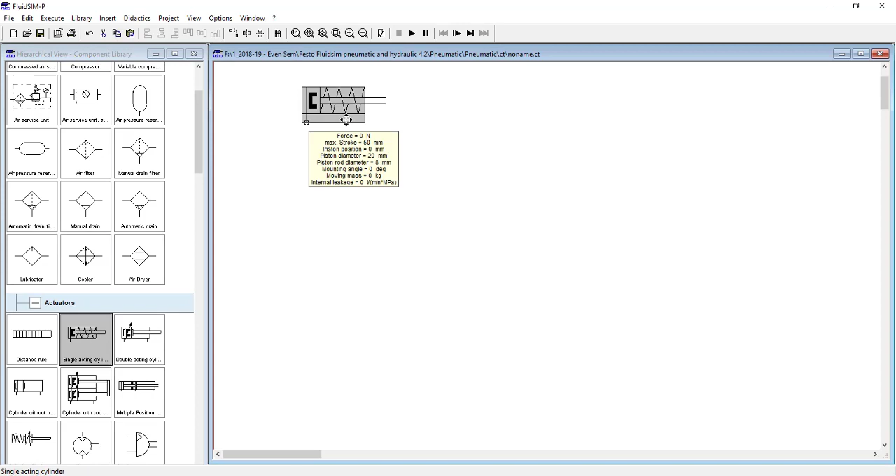Whenever we are doing any kind of pneumatic circuit, in our syllabus there are two main actuators: a single acting cylinder and a double acting cylinder. A single acting cylinder has only one connection while a double acting cylinder has two connections. Whenever you want to push the single acting cylinder forward, you give compressed air to this point.

As soon as there is compressed air at this point, the spring gets compressed because of the force of the compressed air, and the piston moves forward. When the compressed air is removed, the spring forces the piston back and it moves backward. So in this way, you have the forward and backward motion of the piston.

In case of a double acting cylinder, if you put compressed air into the left side and take air out from the right side, then the piston will move forward. Similarly, when you want the piston to move backward, put compressed air into the right side and take the air out from the left side. Then the piston will move backward.

To operate a single acting cylinder, you have to control only one port. To operate a double acting cylinder, you have to control two ports. In a single acting cylinder, there is only one port that must be controlled, hence we need a valve which has only one output port.

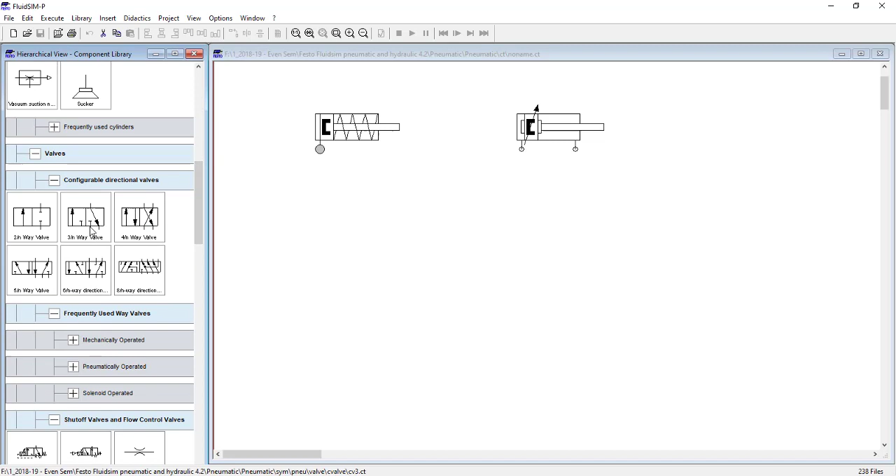For this, we use a 3x2 direction control valve. A 3x2 direction control valve has only one output port. There are two source ports: one is connected to the compressor and three is connected to exhaust. So we will attach this over here, with one always connected to the compressor and three to exhaust.

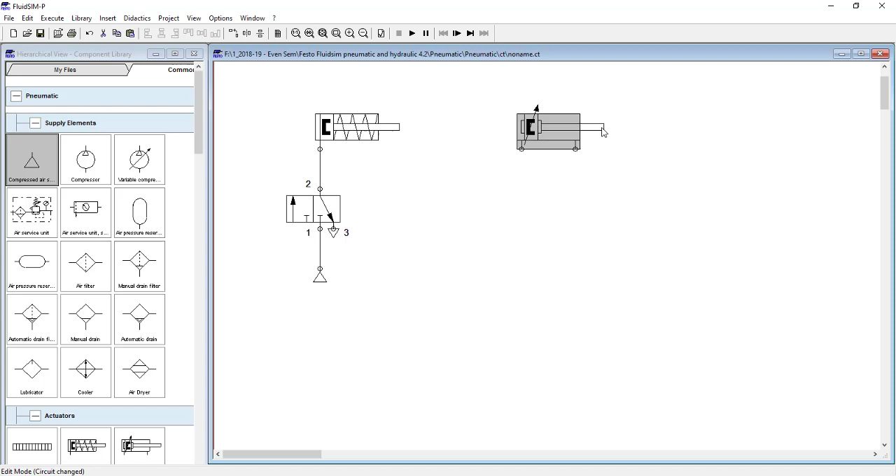For now, I will remove this double acting cylinder. So this is the basic control diagram for a single acting cylinder.

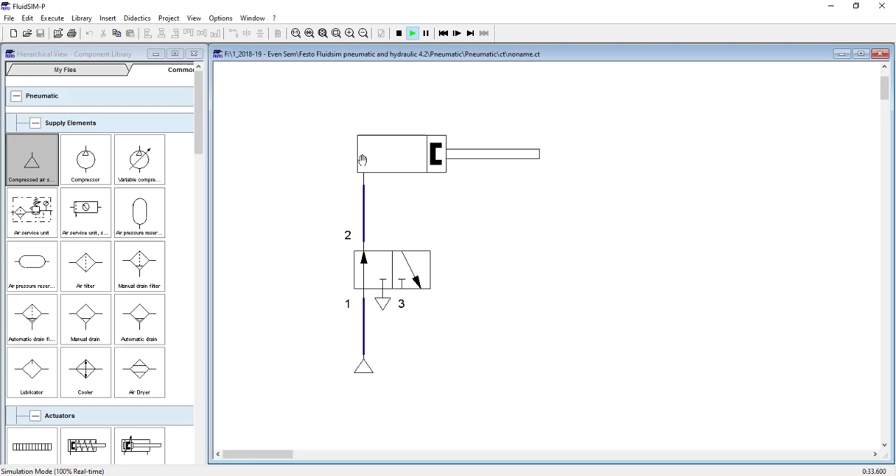Now, if we start the simulation and actuate this, the position of the valve changes. As soon as the position of the valve changes, compressed air goes up, and because of that, the piston moves forward. I'll make it a bit slow to show this. Again, when I deactuate the valve, the spring forces the compressed air out through the exhaust and the piston moves backward.

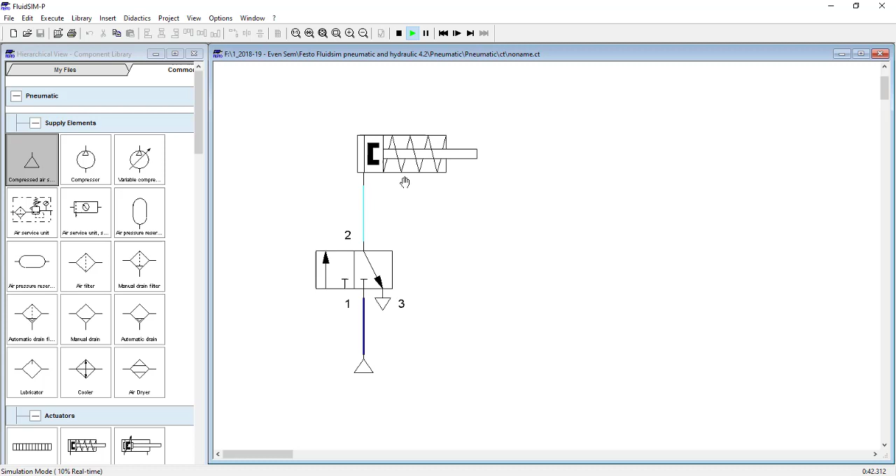So this is how a single acting cylinder is controlled.

Now, as we discussed in the previous lecture, there are several different methods of actuating this valve. There are some manual methods. This is the symbol for a push button. Whenever you have a push button on one side, you will need a spring on the other side. So this is the symbol for a push button operated 3x2 direction control valve.

Instead of a push button, it is possible that you may have a switch. So for a switch, this will be the symbol, with a switch on either side.

Then instead of a switch, you can have something known as a limit switch. A limit switch is similar to a push button; the only difference is that in a push button, humans have to push it, but in case of limit switches, it is the piston motion. A piston comes and hits a certain part, and because of that, the limit switch is activated. Limit switches are used to know the position of the piston.

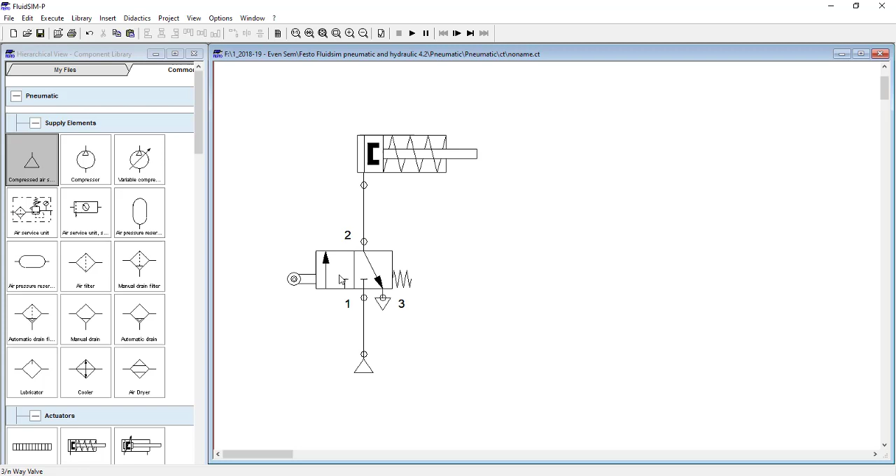All this was covered in the last lecture. Then another method of actuation can be pilot operated. When I say pilot operated, it means that compressed air will be used to change the position of the valve.

If compressed air comes from the left side, the left position will be activated. If compressed air comes from the right side, the right position will be activated. So this is how the different methods of actuation work in case of a pure pneumatic circuit system. In our case, we will be using pilot actuation for pure pneumatic circuits.

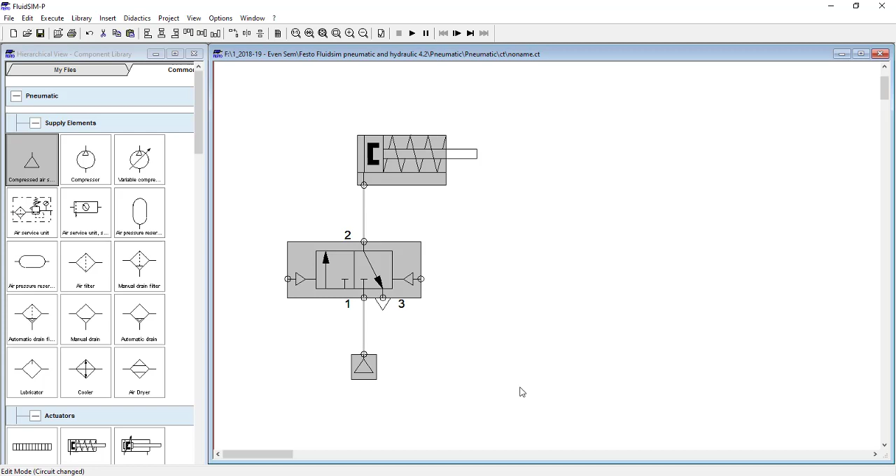In your syllabus, you do not have the pilot actuation of a single acting cylinder. So first we will see how to make the circuit for one double acting cylinder. After we complete that, we'll make circuits for two double acting cylinders.

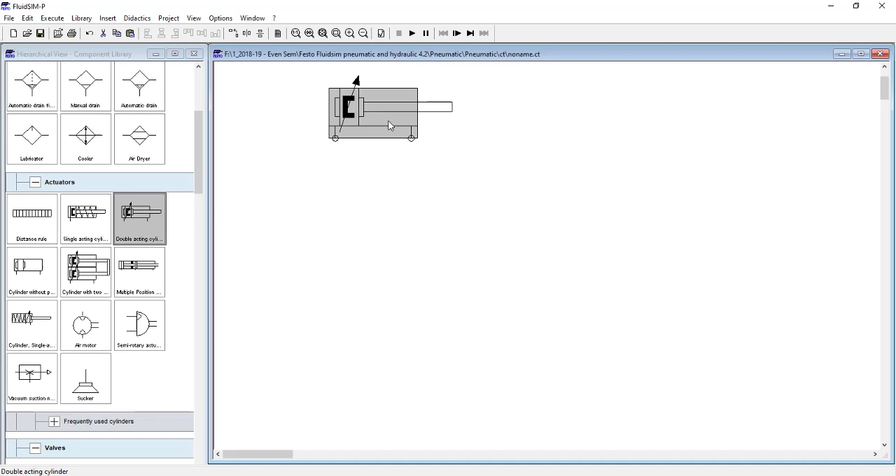Now we will learn how to make a complete pure pneumatic circuit for a double acting cylinder. First, if we want to make a circuit for a double acting cylinder, we will require a double acting cylinder.

Remember, when you are drawing in exam, this should be the diagram for a double acting cylinder, right? No C over here, no arrow over here. This should be the diagram for a double acting cylinder. But right now, because of the requirements of this software, I have to draw this C over here. I will explain this C to you afterwards, but remember that this is just a diagram requirement for this software.

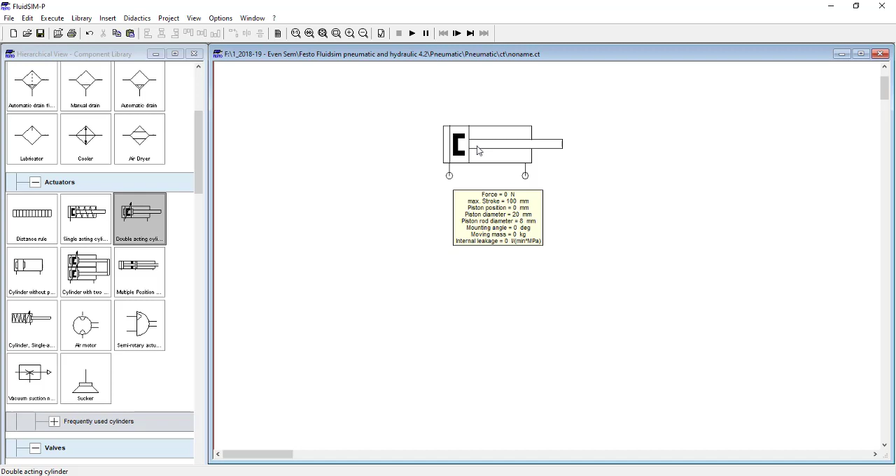Now I have to operate this double acting cylinder. A double acting cylinder has two ports, so to operate this cylinder, I need a valve which has two output ports. So what is the best example?

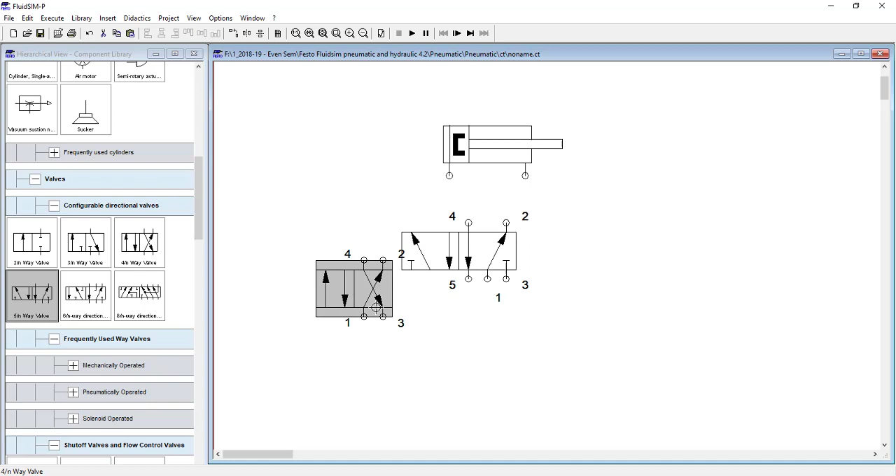I can use either a 4 by 2 valve or a 5 by 2 valve. A 4 by 2 valve also has two output ports, 2 and 4. Similarly, a 5 by 2 valve also has two output ports, 2 and 4. But in case of pneumatics, we use a 5 by 2 valve, and in case of hydraulics, we use a 4 by 2 valve. So as we are doing a pneumatic circuit, we will delete this 4 by 2 valve and use the 5 by 2 direction control valve.

So remember, whenever you draw a double acting cylinder, to control the pneumatic double acting cylinder, we will require a 5 by 2 direction control valve. Now with this, we will make the connections. We will connect the left port of the 5 by 2 valve to the left port of the cylinder, and the right port of the 5 by 2 valve to the right port of the cylinder. So these connections are done.

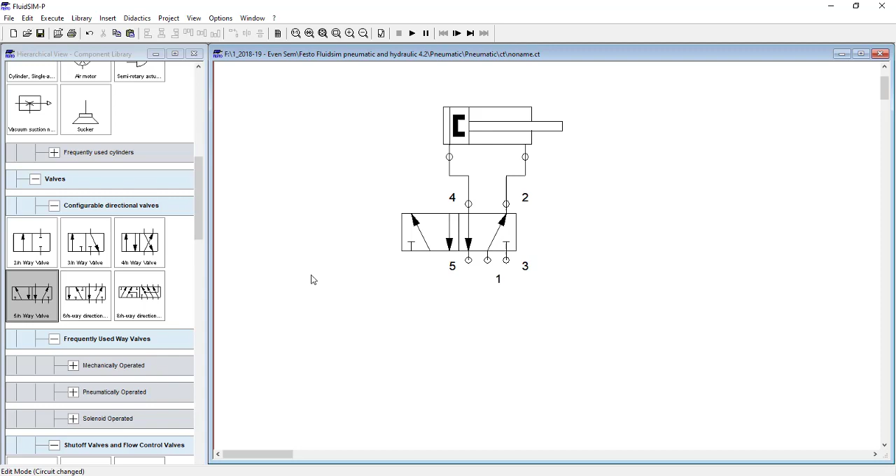As I always say, port number 1 should be connected to your compressor. Over here, port number 5 should be connected to exhaust and port number 3 should also be connected to exhaust. Always remember, number 1 is connected to compressor and the other ports on the source side are connected to exhaust. Now, how should the position be set?

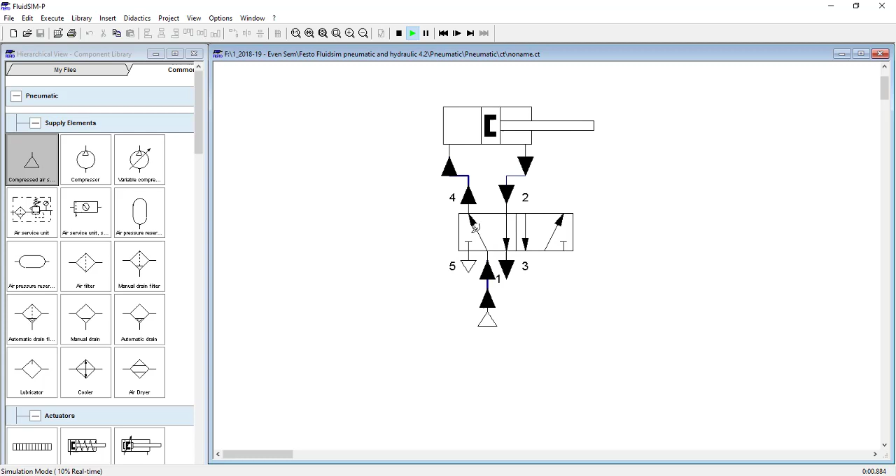First, we will just see the simulation of this. Initially compressed air is going to the right side, so the piston is in retracted position. As soon as I do this, compressed air goes to the left side and the piston moves forward. As soon as I do this again, compressed air goes to the right side, air comes out from the left side, and the piston moves backwards. So this is happening right now.

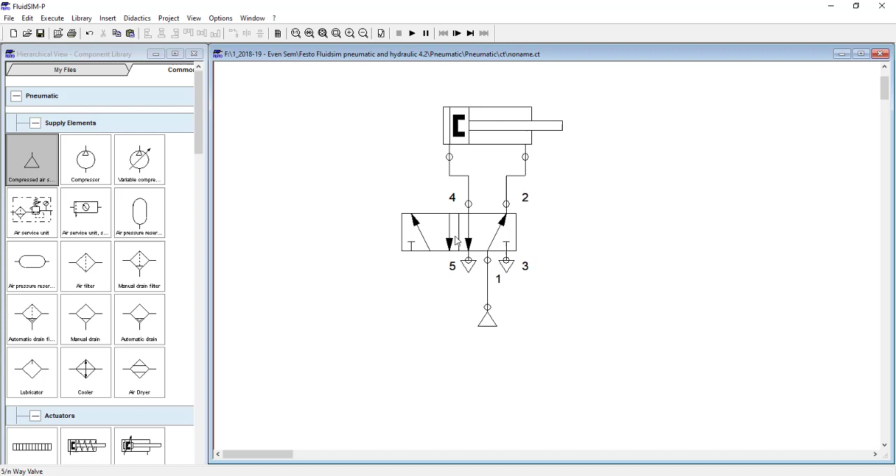Now what is the problem? The problem is how to actuate these valves. Right now there is no method of actuation. We are doing it with the mouse, but physically, if we make this circuit in real life, how are we going to change the positions of the valves? So we need some method.

That method can be either a push button. I am just putting a push button over here. As long as I keep this push button pressed, my mouse is currently pressed, the piston is forward. As soon as I leave my mouse, the piston comes backwards. So I press it, it remains forward. I leave it, the piston comes backward.

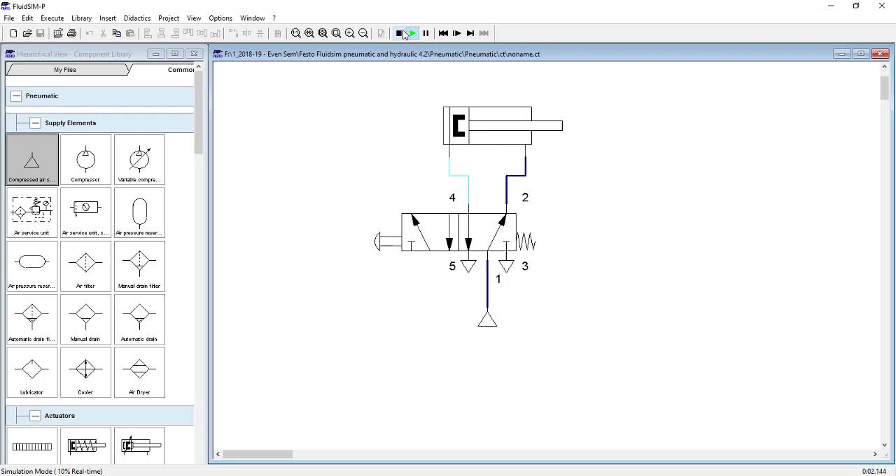Instead of this, I can use a switch. Instead of a push button, I can use switches. Now if I turn it on, I just have to click it and leave it. Even if I leave it, the piston remains forward. If I want to bring it back, I have to click the switch again and the piston will come back. So this is how I can control the double acting cylinder manually.

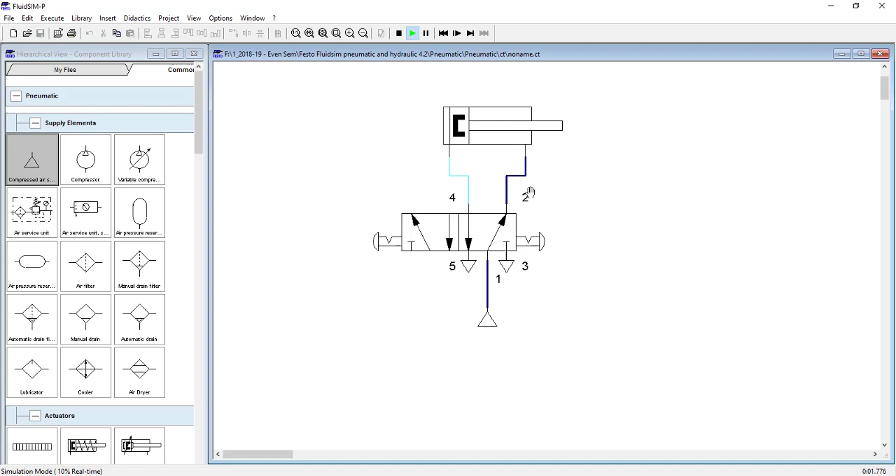But in industry, we do not want complete manual control. We want some degree of automation. For example, let us say we are making some kind of a pounding device. So what is this piston doing? Once we turn on the system, the piston should move forward, pound whatever is to be pounded, and then move backward. A good example of this kind of machine can be your stamping machine.

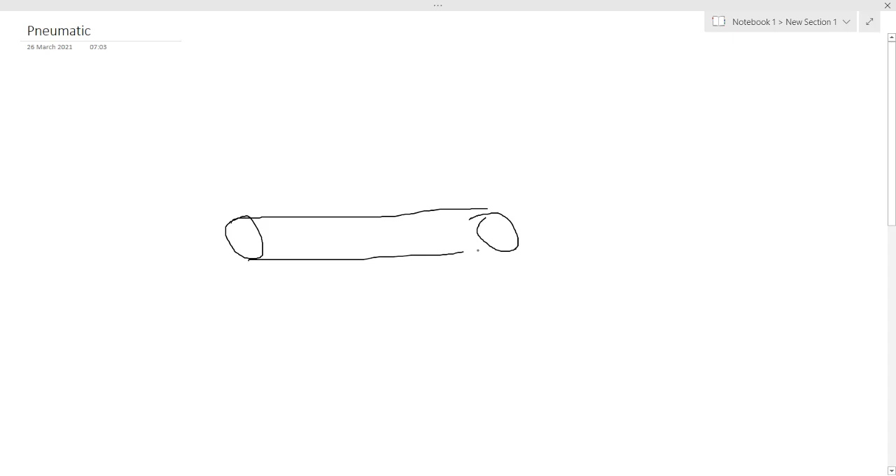For you to visualize, let us see this: there is a conveyor belt, and on this conveyor belt there are some kinds of things which are moving forward.

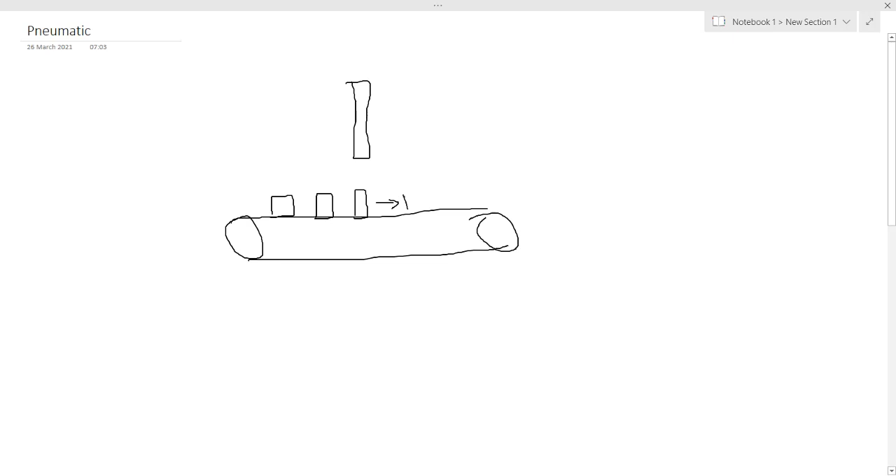Okay, so these objects are moving forward on a conveyor. It is necessary that these things have to be compressed, or something has to be done to them. Their shape has to be changed, or some kind of design or label has to be put on them. So to do that, what is required? There is this piston cylinder arrangement. Whenever this object comes forward, this piston should move down, stamp this thing, whatever has to be done is done, and then the piston moves upward. Next object comes, again piston moves down and up. Again next object comes, piston moves down and up. Now the speed of the conveyor belt is fixed, so the objects come at a fixed speed.

So if we can control the timing of this piston, we can control the stamping of these objects. This is exactly what we want our piston to do: come forward once, then go back, then again come forward, then go back, and this process should continue infinitely. Once the system is started, this should continue infinitely. So we have to make a circuit that once I turn it on, it will keep on stamping till the end. This type of circuit is known as an A plus A minus circuit.

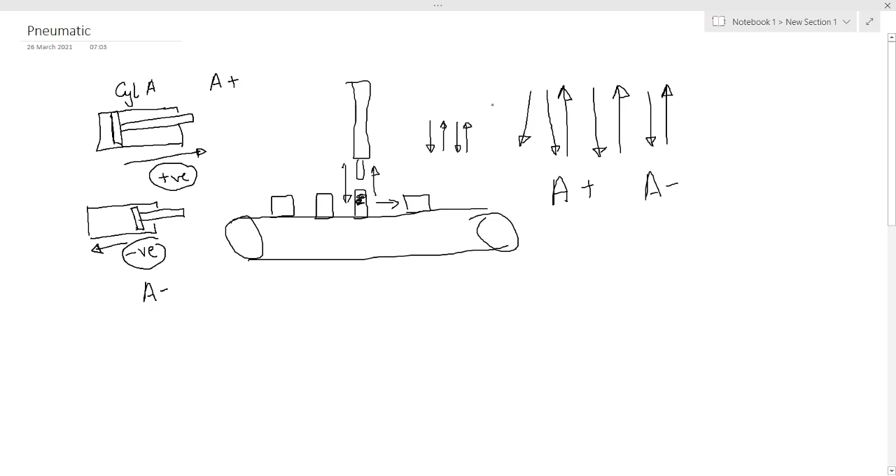Now if I name my piston cylinder arrangement as cylinder A, the forward motion will be termed A plus and the backward motion will be termed A minus. So in my circuit, what is happening? First there is forward motion, outward motion, then reverse motion, inward, outward, inward. So outward motion is symbolized by A plus, and inward motion is symbolized by A minus. My system is continuously doing A plus, A minus motion.

So I have to make a circuit in which as soon as I press the start button, the piston should move forward. After the piston has reached its ultimate point, the maximum point possible, the piston should move backward. Again, when the piston has reached its ultimate reverse point, it should again move forward, then backward, then forward, then backward. This should continue.

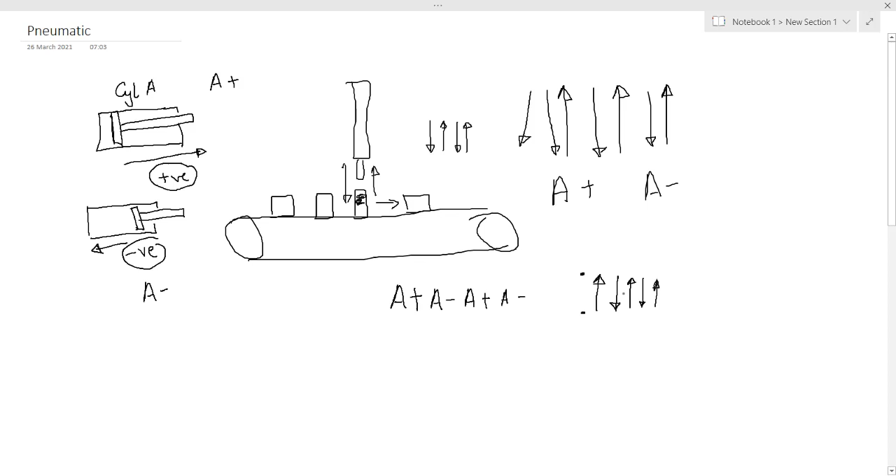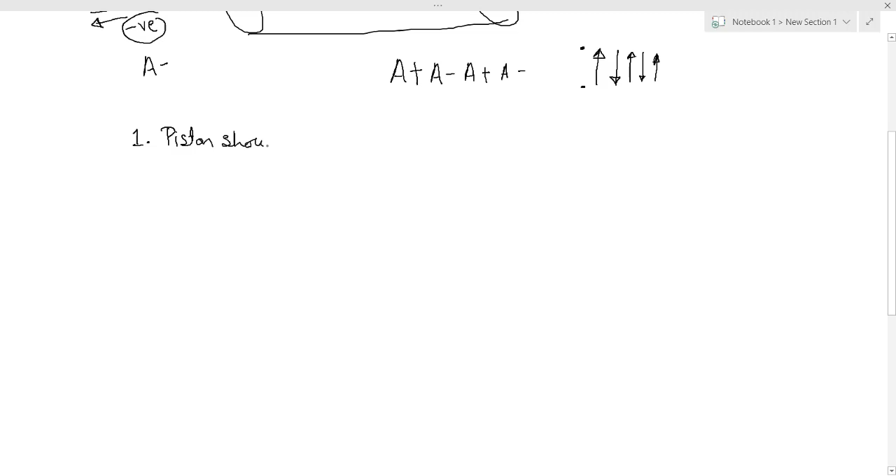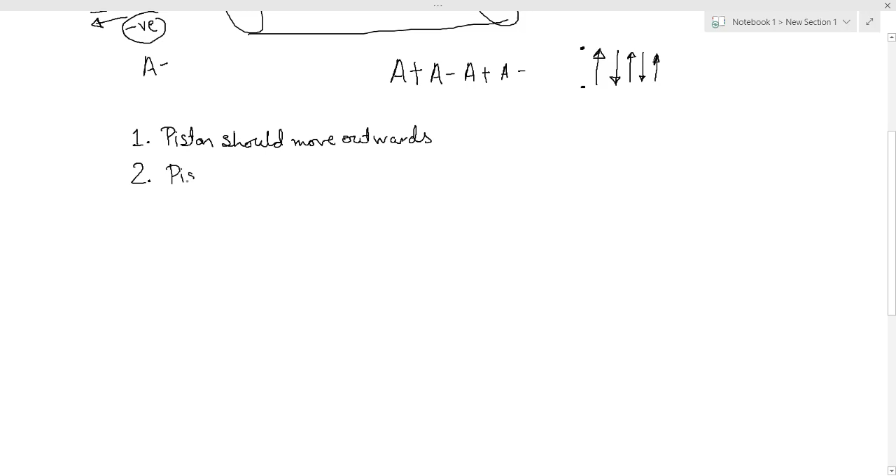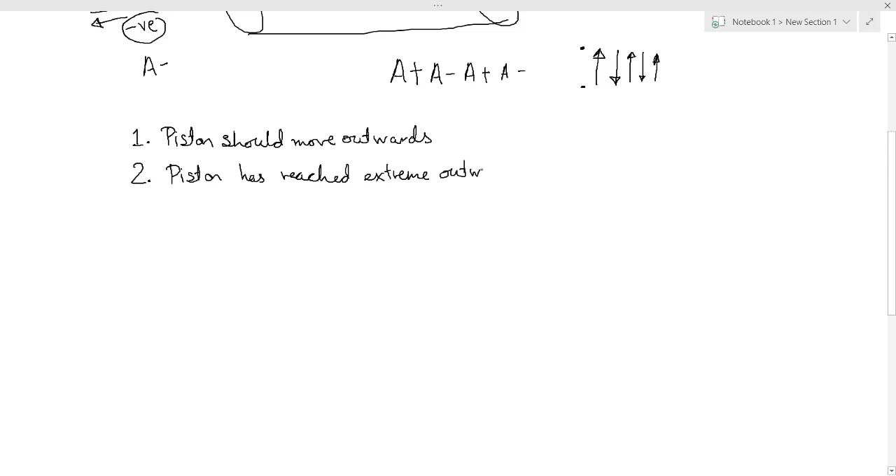So first, before making the circuit, we will write these steps in English. Step 1: piston should move outwards. Then, once the piston reaches its most outward position, that is, the piston has reached its extreme outward position. Once that happens, the piston should start moving backwards.

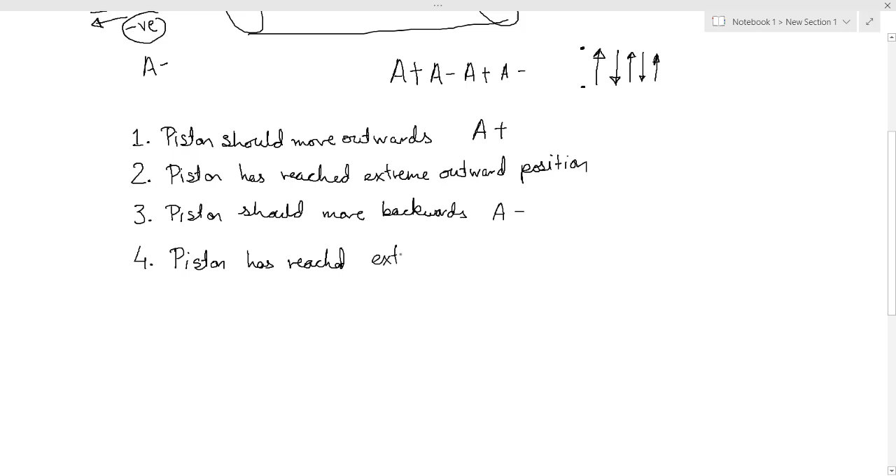Piston moving forward is A plus, and piston moving backward is A minus. Now the piston has started moving backwards. It should move backwards as long as it does not reach its most inward position. As soon as it reaches its inward position, the piston has reached its extreme inward position, meaning it has retracted back completely. After that, again the piston should move outwards. This step should take place again. So this is how the system should continuously operate.

So what do we require? We require some way of knowing that the piston has reached its extreme outward position and that the piston has reached its extreme inward position. So we need some kind of sensor which will tell us that the piston has reached its outward position.

Now it is time to change the direction of the valve so that the piston starts moving inwards. Again, we need some kind of sensor which will sense that it has reached its extreme inward position. So now again the valve's position must be changed so that the piston starts moving forward. We need two sensor kind of things, but we will not be using any kind of proximity sensor, because this is a pure pneumatic circuit. We cannot use sensors in this case.

So in pure pneumatic circuits, rather than using sensors, we use limit switches. What does a limit switch do? A limit switch uses the position of the piston to turn on and turn off the valve, and this valve can control the flow of air. I have explained limit switch in detail in the last lecture. So this limit switch can be used to change the position of the valve and thus change the position of the piston. Now where should these limit switches be put?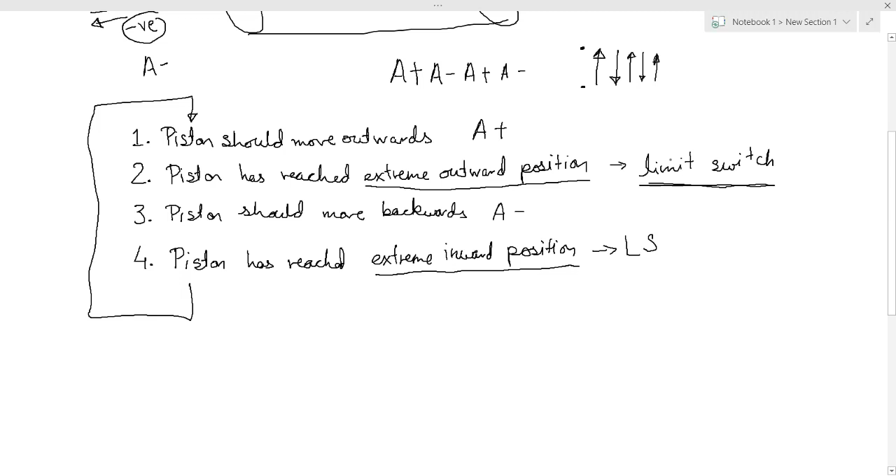See, this is my system. Let me draw it over here again. This is my cylinder, and inside my cylinder, this is my piston. Let us say that this is the complete retracted position of the piston, and when the piston comes completely forward, this is the complete forward position of the piston. So I need to put a sensor over here so that whenever the piston is completely inside, this will be active, and whenever the piston is completely outside, this will be active.

So in pneumatics, the complete inward position of the piston is denoted by A1, and the complete outward position of the piston is denoted by A2. So we need two limit switches, A1 and A2, which will be used to change the position of the valve and thus allow for the motion of the piston.

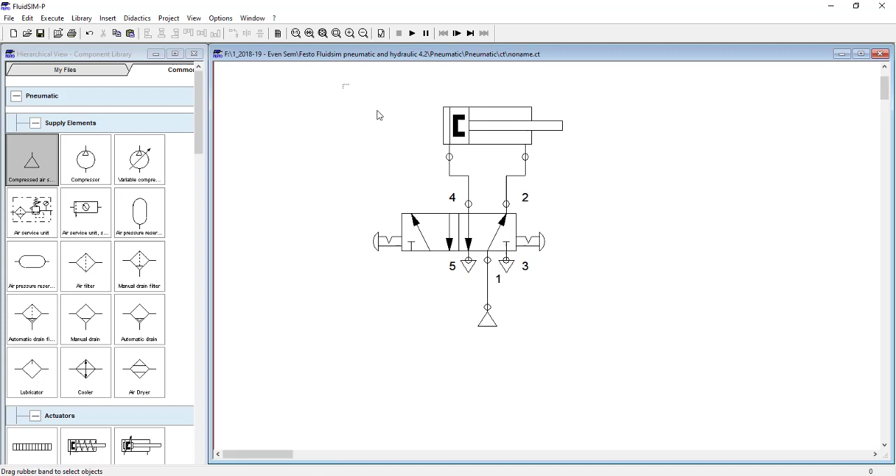Okay, so this circuit we will now be drawing in our software. So this is our initial circuit. In this initial circuit, what we were doing, we were using limit switches. But now what we have to do, we have to make this automatic. So first of all, we need two limit switches, because this is a double acting cylinder.

So A1 limit switch is telling you what? A1 limit switch is telling you that the piston is completely retracted, completely inside. A2 is telling us that the piston is completely outwards, completely outside. So now we have to draw these limit switches also.

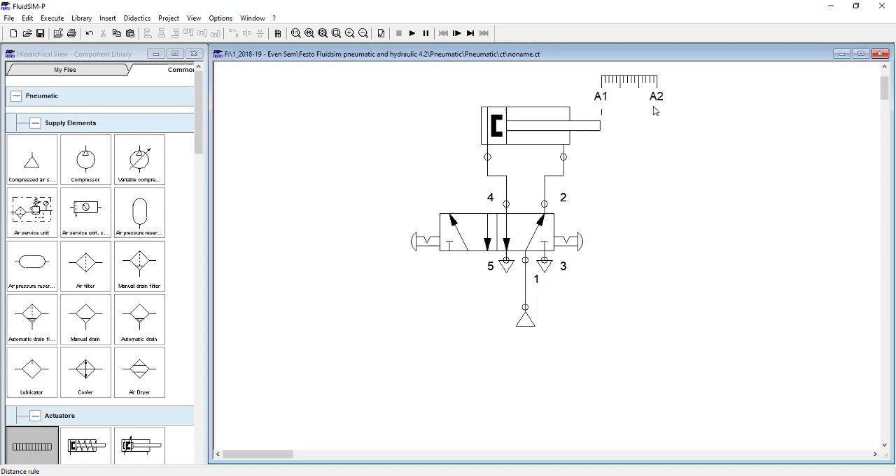Here we have just marked the limit switch position. That limit switch will be at this point and limit switch will be at this point. What are limit switches? As I have told you again and again, limit switches are nothing but 3x2 direction control valves. The only difference is the actuation is with a limit switch. So this is my limit switch, 3x2 direction control valve.

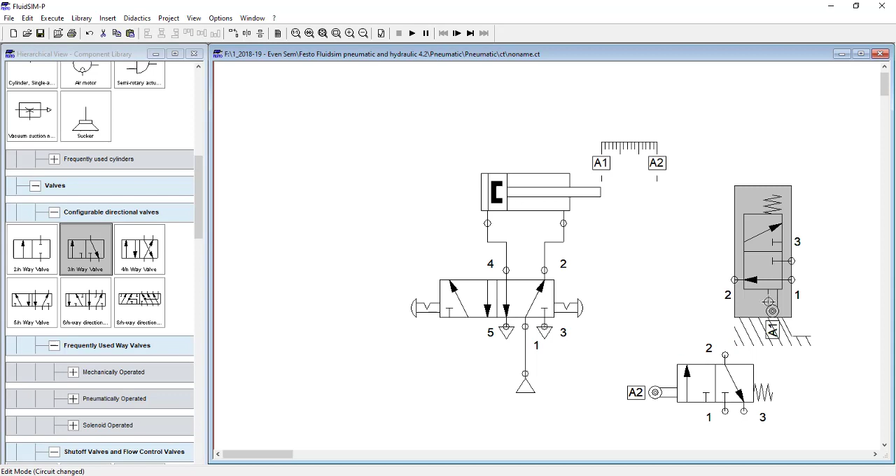We need how many limit switches? We need 2 limit switches, A1 and A2. So let this be A1 and let this be A2. In real life, rather than doing like this, we are going to rotate it by 90 degrees. A1 will be kept over here.

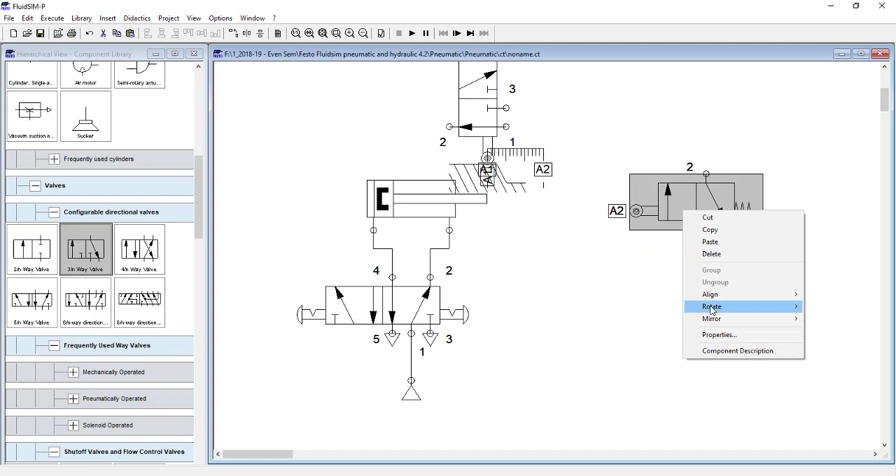Just give me a minute. This is my A1. So A1 will be kept over here — this will be my A1 limit switch. Similarly, A2 limit switch will be kept over here. Let us rotate it further by 180 degrees. I can put A2 limit switch over here.

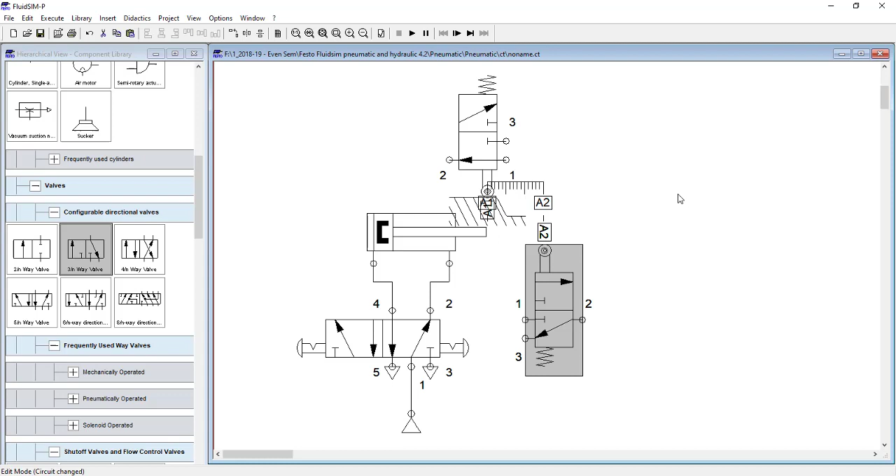So whenever the piston moves forward, it will operate. Whenever the piston is inwards, completely in, A1 limit switch will be pushed, and when the piston comes completely out, A2 limit switch will be pushed. But drawing these limit switches like this makes the diagram very cumbersome — we cannot easily read it. So to make this diagram more readable, we just mark the position of the limit switches A1 and A2, and we draw the limit switches below only. Okay, so this is how the system works. Now see what should happen.

This is my A1 and this is my A2. Whenever A1 is sensed, first the piston should move outwards. For the piston to move outwards, the left position of the valve should be active. Whenever the left position of the valve is active, the piston will move forward. As soon as it reaches A2, it has reached the maximum possible distance, so now it should start moving backward.

To move backward, the right position of the valve should be active. To move forward, left position of the valve should be active. To move backward, right position of the valve should be active. So whenever we want to move the piston forward, we should activate the left position.

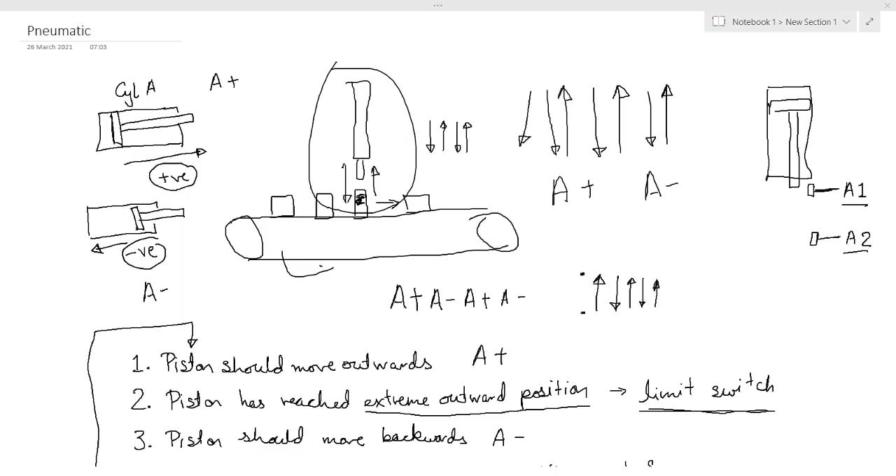Now, when should the piston move forward? The piston should move forward when the A1 position sensor is sensed. When is A1 position sensor sensed? When the piston is completely inside. The piston should move outwards, and it will keep moving outwards till it reaches its extreme outward position, which is A2.

As soon as it reaches A2, it should start moving backwards. It will continue to move backwards till it reaches its extreme inward position, which is A1. As soon as A1 sensor is sensed, the piston should start moving outwards. So when should the piston start moving outwards? When A1 sensor is sensed. And when should the piston start moving inwards? When A2 sensor is sensed.

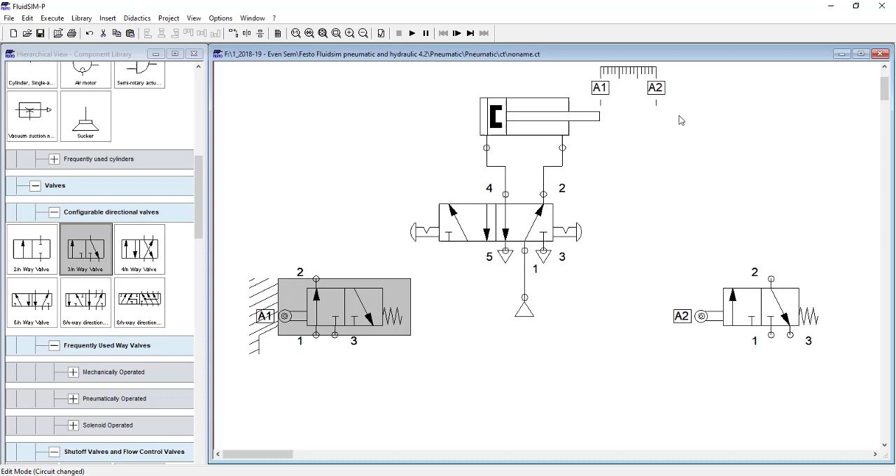When A1 sensor is sensed, the piston should start moving outwards. It will continue moving outwards till A2 sensor is sensed. As soon as A2 sensor is sensed, the piston should start moving backwards. So this is the circuit that we are going to make. Whenever A1 sensor is sensed, the piston should start moving forwards. A1 is inside, so piston should start moving forward.

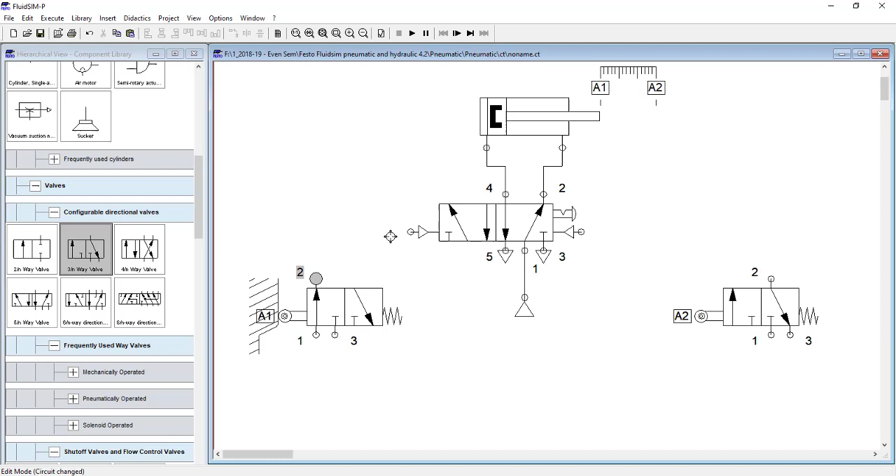For this, for pure pneumatic circuits, we are going to use pilot operated valves. So whenever A1 is sensed, this left position should become active. We will put a limit switch connection like this. Whenever A1 is active, currently it is completely inside. Compressed air is going from this compressor and it will push this one active, making this position of the valve active, and the piston will move outwards.

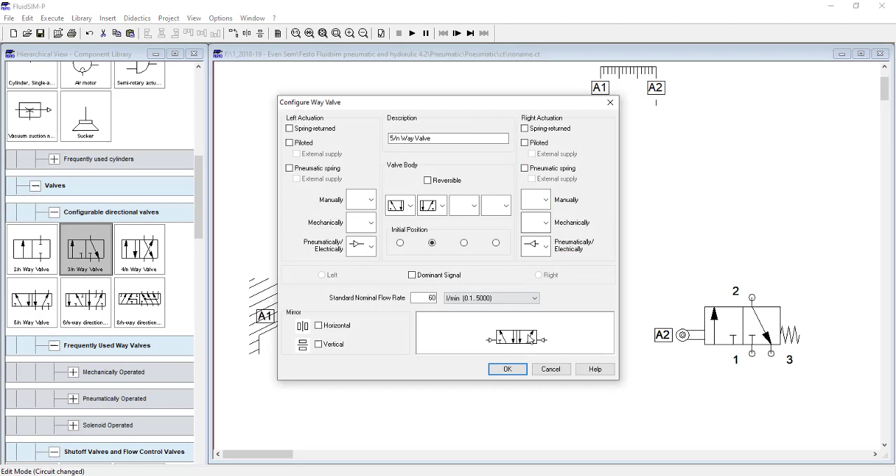As soon as the piston reaches A2, the piston should start moving inwards. To start the piston moving inwards, we should activate the right position. To activate the right position, we will make this connection. And then for 1 and 3 also we need a compressor. We can either add a different compressor or use this compressor itself. In this case I am going to add a different compressor.

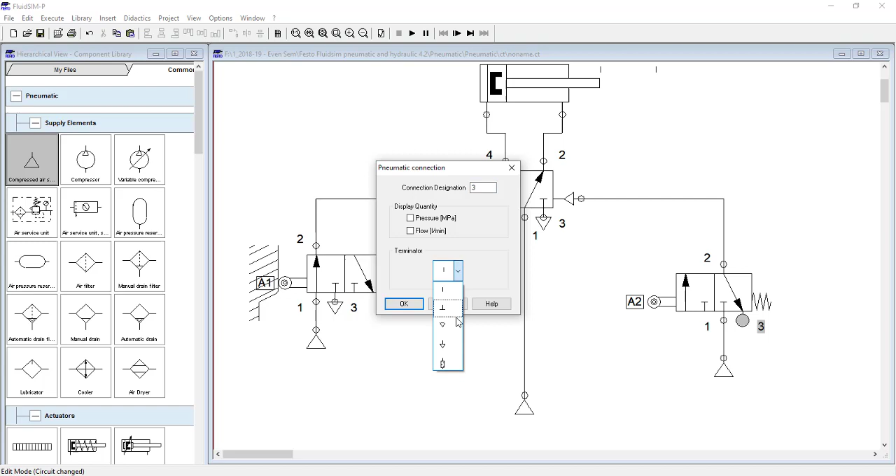You can add as many compressors as you like, no problem. In this diagram, in real life there will be only one compressor, but to make the reading of the diagram simpler, we can add as many compressors and exhausts as we like. This is similar to what we do in electrical systems, where we put a large number of grounds. All the grounds are connected to each other, but we put many grounds anywhere to make the system more readable.

So this kind of completes my circuit. As soon as I start the compressor, the piston will move forward, then backward, then forward, then backward. I have achieved my A plus A minus motion, my stamping operation. You can keep this piston vertical and it will do the stamping function.

Now let us see step by step how this system is working. This is my initial circuit. As soon as I turn on the circuit, compressed air has started flowing, from this compressor and from this compressor. Currently the piston is at position A1. Initially nothing was active, and the piston is at position A1, so A1 limit switch is active.

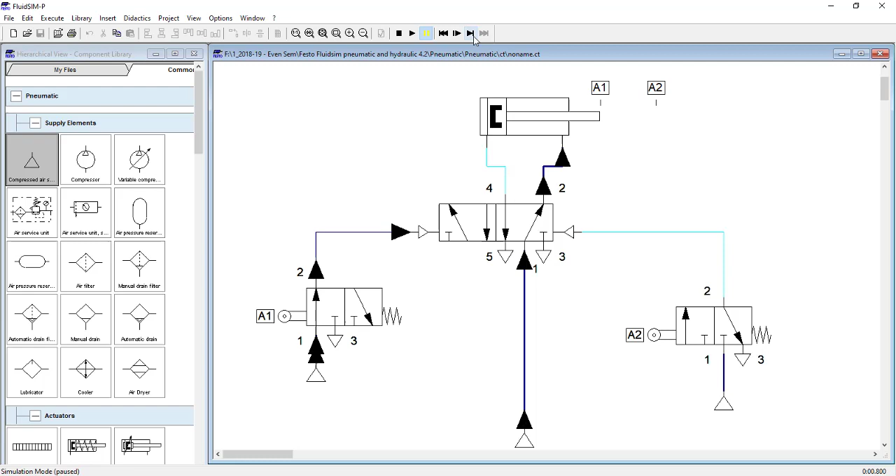Piston shall start moving inwards. Piston moves inwards a little bit, A2 gets deactivated. Piston moves completely inside, A1 gets activated, valve position changes, piston moves outwards. So this will keep on happening continuously, and this is how you get your A1, A2, A plus, A minus motion. So hopefully you have understood at least the basic A plus, A minus motion of your piston cylinder.

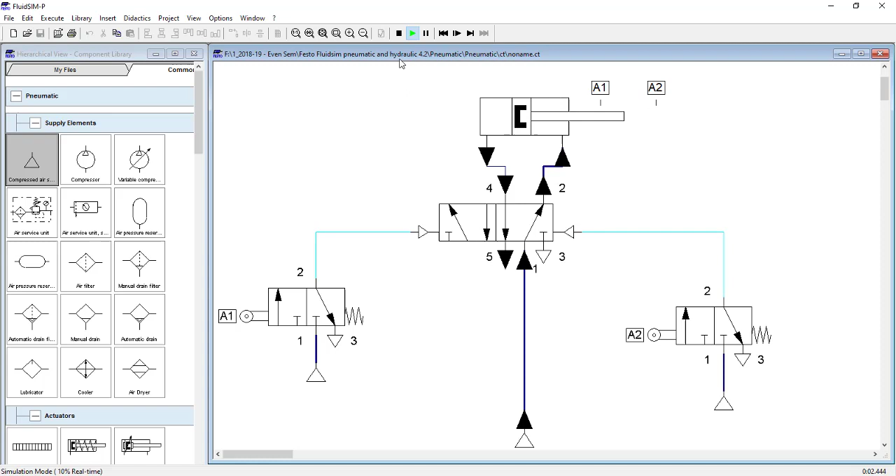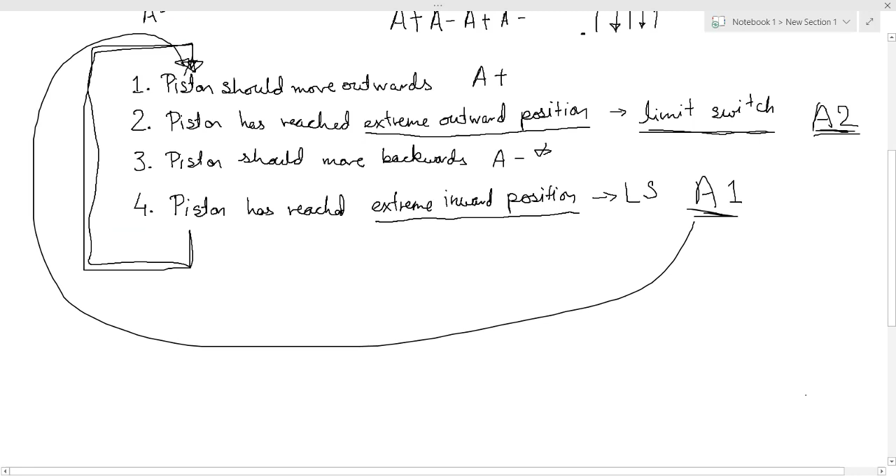So now that we have completed the control of a single cylinder, now we will see the control of two cylinders. First of all, I will delete this completely. Now first of all, we will see how to control, what is the control strategy.

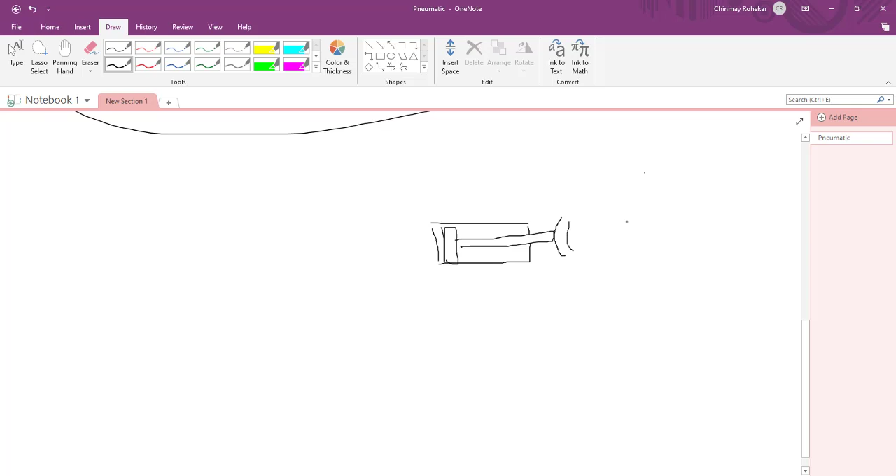This piston cylinder is used for clamping the device. There is some kind of a clamping system over here, and this will clamp the device, and then there will be a piston cylinder at the top, and this will be the piston cylinder that actually does the stamping process, right? So what should happen?

First, this piston should come outwards so that the object is clamped. Then what should happen? Then this should come downwards so that this is now stamped. Then this piston can move backwards and this can move backwards. So in this application, what kind of motion can we have?

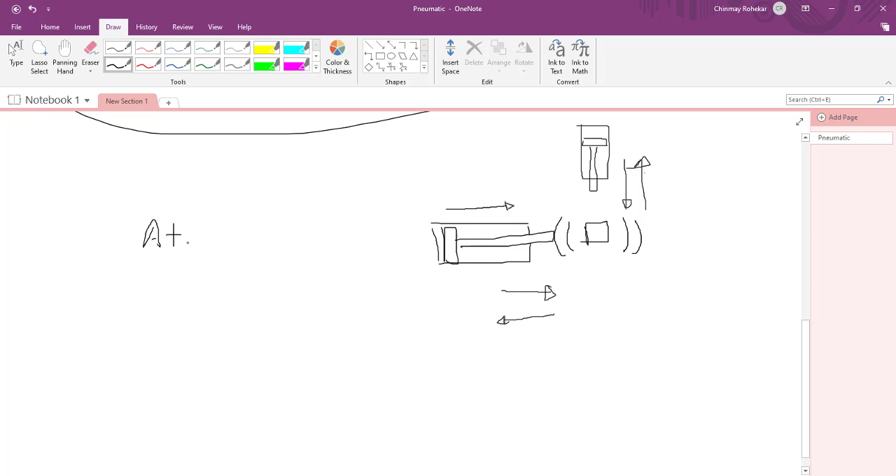We can have first A plus. Why? Because initially this piston is going to move forward, outwards. So that is A plus. Then the second piston is going to move outwards, that is B plus. Then this piston is going to move inwards, so let that be A minus. Then this piston is going to move inwards, so that will be B minus.

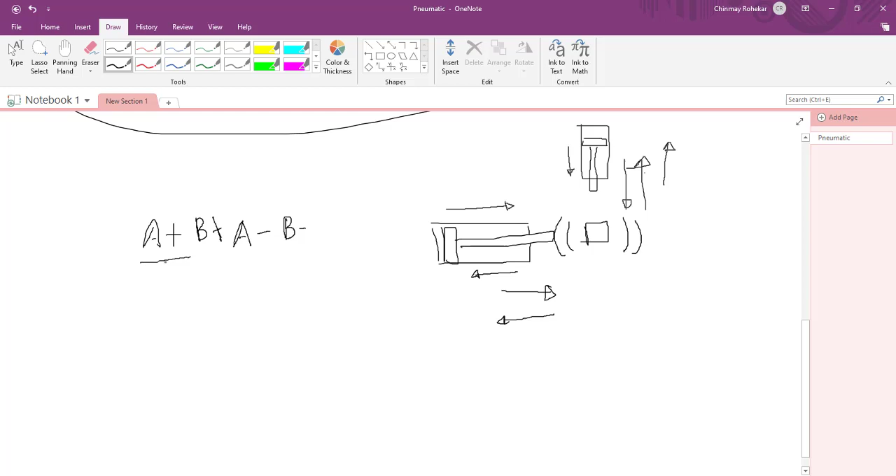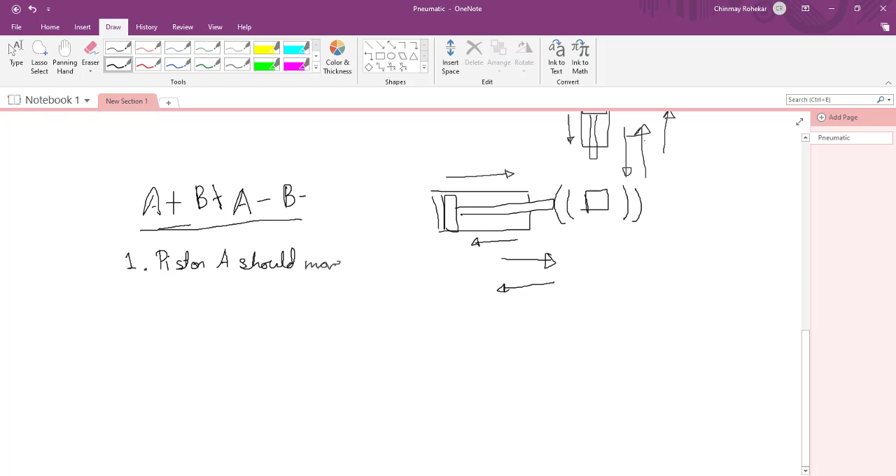So what kind of motion do I want? I want A plus, B plus, A minus, B minus motion, right? Now how will we write this in English? We can write this like, initially piston A should move forward. Should move forward. Till what time should piston A move forward? Piston A should move forward till it reaches extreme outward position.

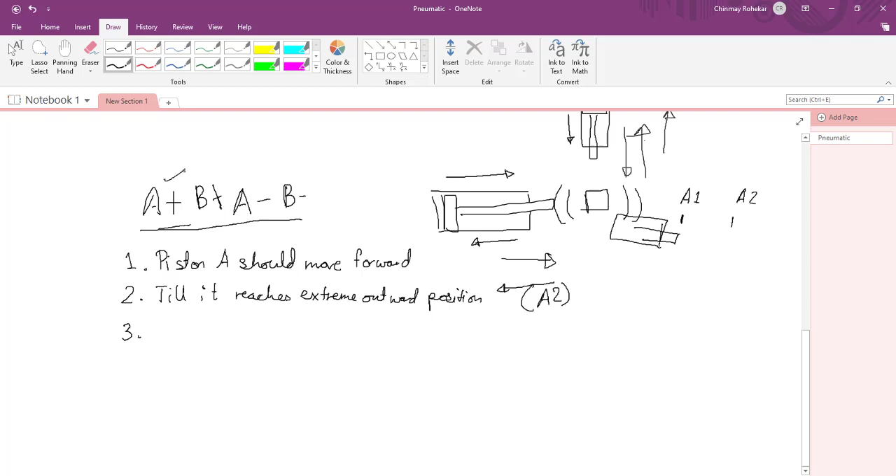Now we know from our system what are the two limit switches that we used. One is for the inner position and one is for the outer position. For inner position we use A1 and for outer position we use A2. So what is happening? A2 will get sensed. As soon as A2 gets sensed, what should happen? A plus is A2 get sensed means the piston has moved completely outwards. So A plus is complete.

Then what should happen? B plus should happen. That means piston B should move forward. Piston B should move forward for how much? Till piston B reaches extreme position. Right? That should be the case. Extreme outward position, that means B2. If A2 is the extreme outward position for cylinder A, then B2 is the extreme outward position for cylinder B, piston B.

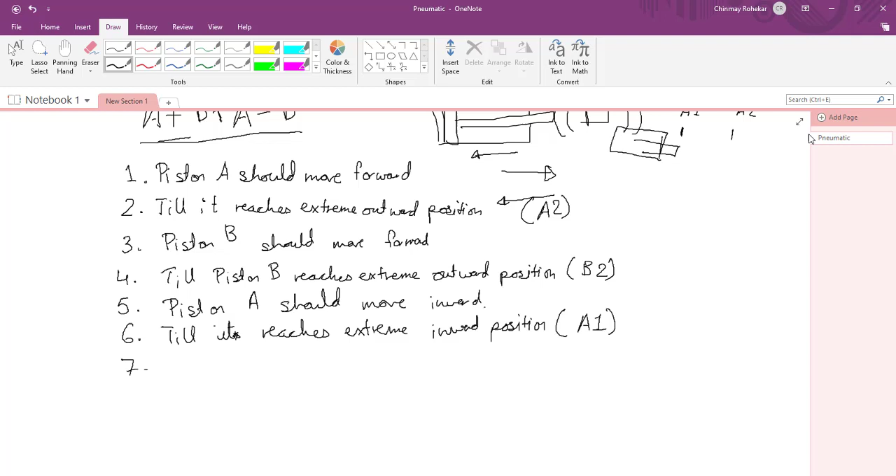Then what should happen? A minus. So piston A should move inwards. Till what it should move inwards? Till it reaches extreme inward position. What is the extreme inward position? Extreme inward position is A1, right? As soon as A minus is complete, it has reached its extreme inward position.

What should happen? B minus should happen. So B minus means piston B should move inwards. Till what time it should move inwards? Till it reaches its extreme inward position. What will be the extreme inward position of piston B? B1. After this, B1 means B minus motion has completed. Again, A plus should take place.

So this cycle will continue, right? So first of all, A should move forward till it reaches A2. Then B should move forward till it reaches B2. Then A should move inward till it reaches A1. Then B should move inwards till it reaches B1.

Now this entire thing in English can be written in simple diagrammatic form. How can we write this? First of all, piston should move forward, that is positive motion, till it reaches A2. Then B should move forward, means B plus, till it reaches B2. Then A should move inwards, means A minus, till it reaches its extreme inward position, means A1. Then piston B should move inward, B minus, till it reaches its extreme position, B1. So this is what should be written.

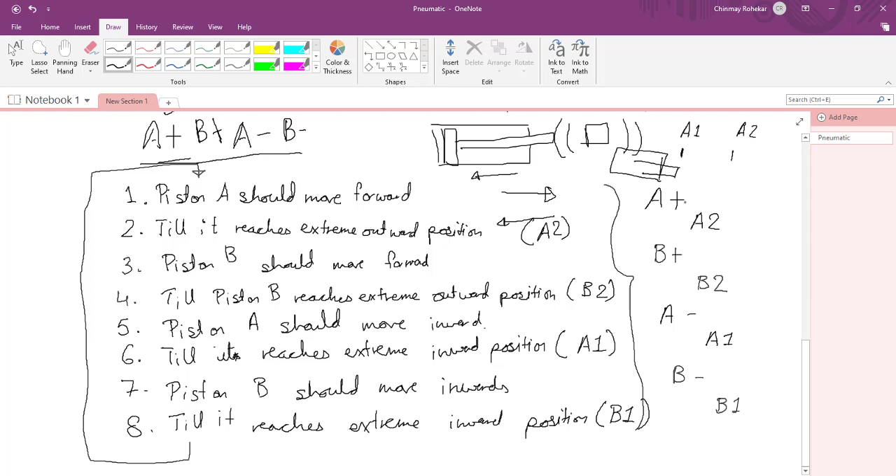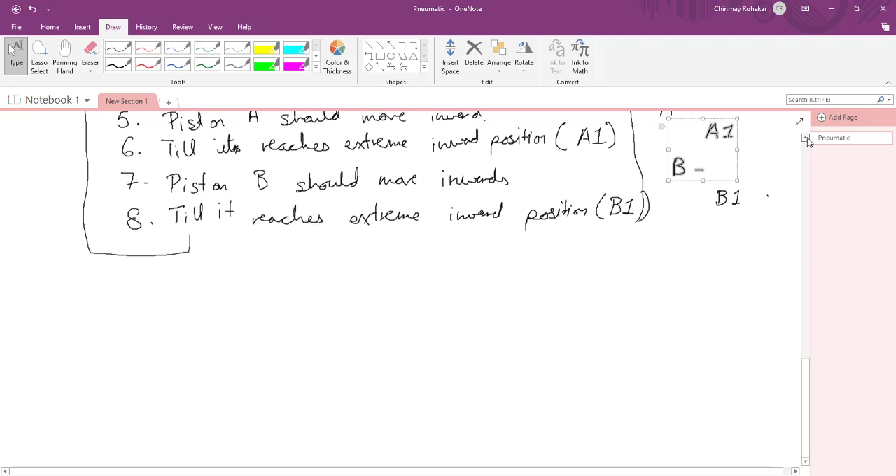Now rather than writing it in this vertical form, we can write this in horizontal form. Whatever is written here, I am going to write the same thing in horizontal form. What is written? A plus, then B plus, A minus and B minus - first I will write the motions of the piston. And which are the limit switches? Between A plus and B plus, we have the limit switch A2, so we write it like this. Between B plus and A minus, we have the limit switch B2. Between A minus and B minus, we have the limit switch A1. And between B minus and A plus, we have the limit switch B1. So we write it like this.

So this is what we have written. This is what we have to make a circuit for, right? So keep this in mind. Whenever you are given a question, you have to find out the sensors or limit switches which come between these positions. So now we will go and make our circuit. So our circuit is A plus, B plus, A minus, B minus.

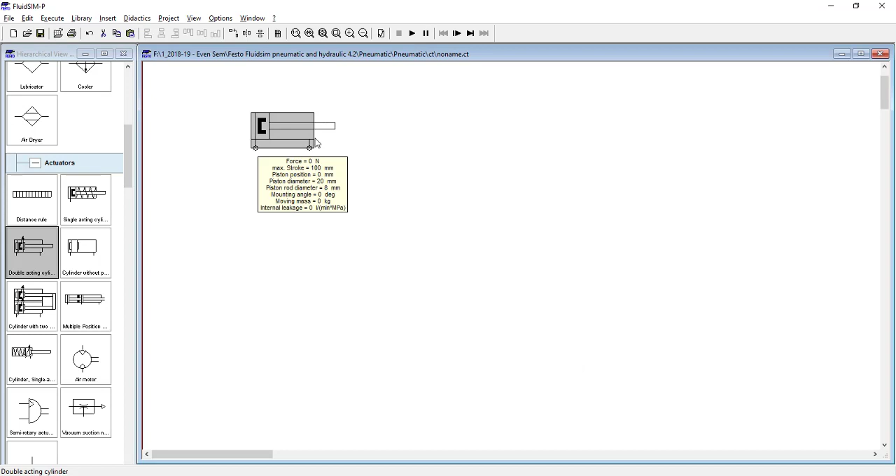So first of all, what do we need? We need two double acting cylinders. If we have to make control of two cylinders, then we will require two double acting cylinders. So this is my first cylinder, this is my second cylinder. Just so that you understand this, we will give them names. Let this be cylinder A.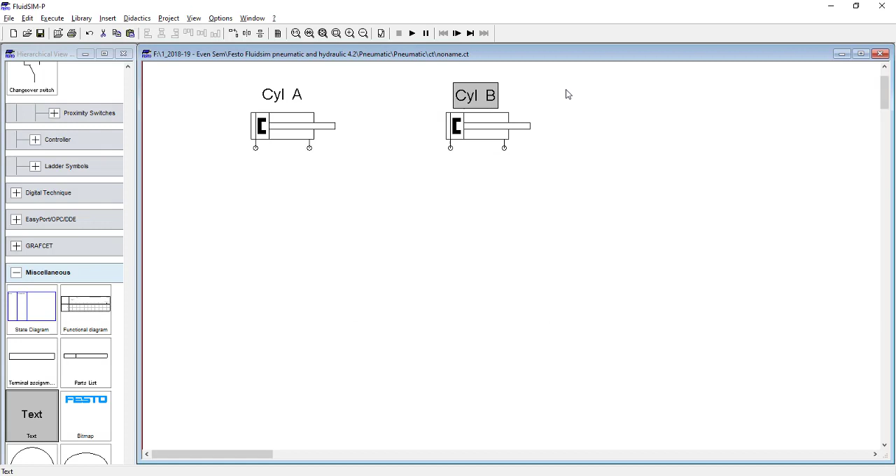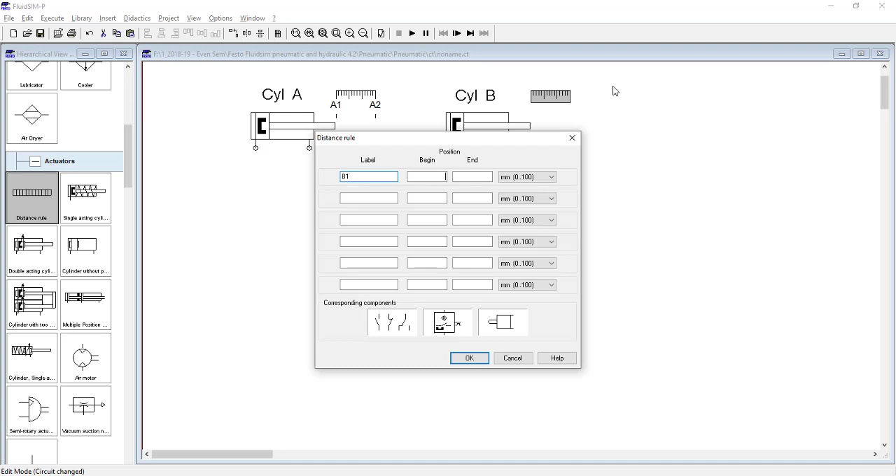Similarly, this will become your cylinder B. As soon as you draw the cylinders, the next step should always be to draw the limit switches. So we have cylinder A, cylinder B. We will draw their limit switches. For cylinder A, inward is A1 and outward is A2. Similarly for cylinder B, we will have B1 and B2. So this is done.

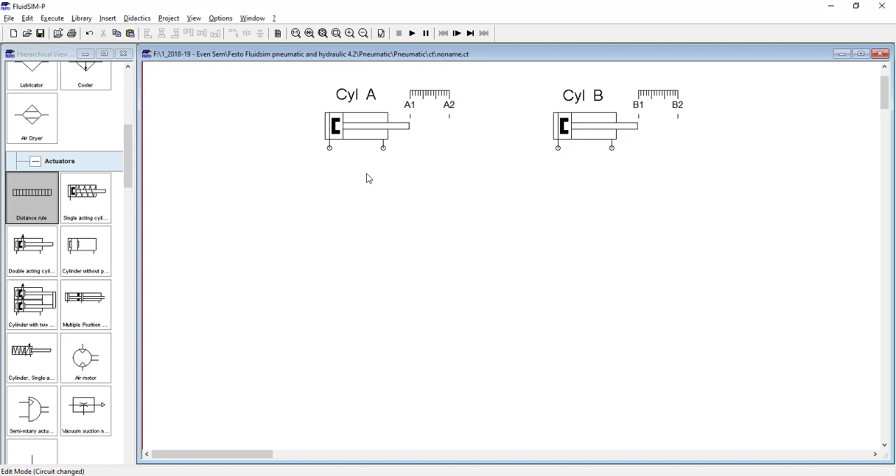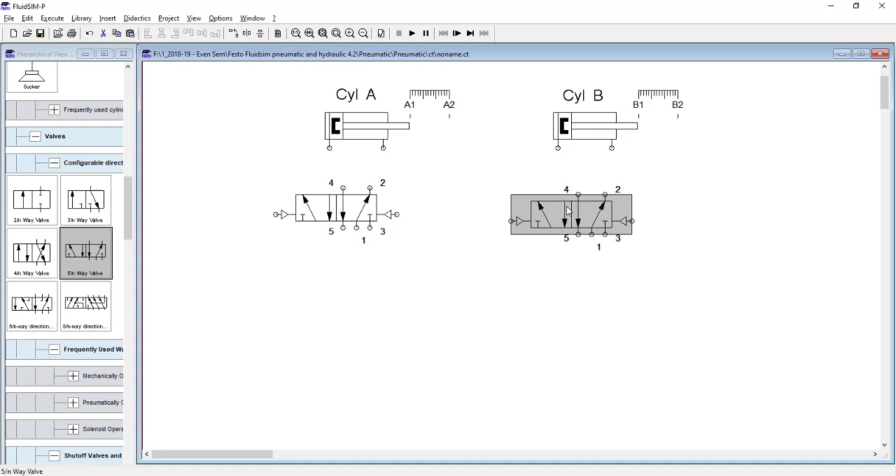Now what should be the next step? We have drawn cylinder A, we have drawn cylinder B. Now to control cylinder A, I will bring it in center a bit. To control cylinder A, we require a 5/2 direction control valve. So we will draw a 5/2 direction control valve. Because this is a pure pneumatic circuit, it will be pilot operated on both sides. We need a similar kind of 5/2 direction control valve for cylinder B also. So we'll connect this to this, this to this, this to this, and this to this. We have drawn cylinder A, a valve to control cylinder A's position, cylinder B, and a 5/2 direction control valve to control the position of cylinder B.

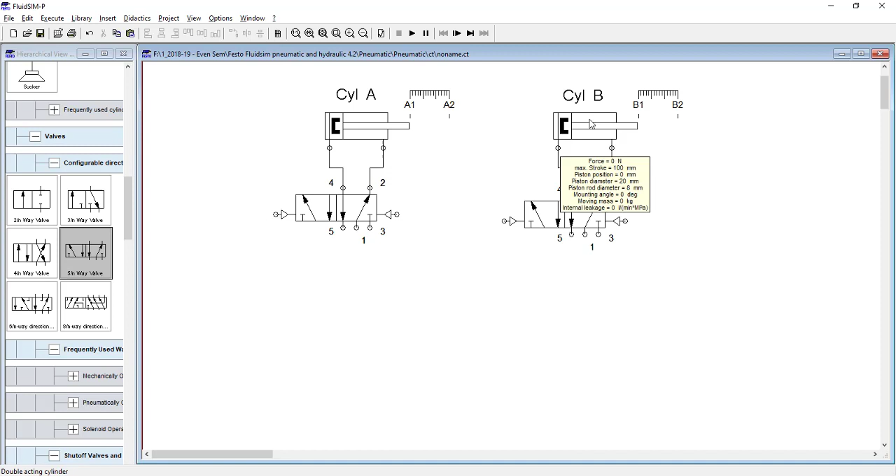We have drawn limit switches A1. We have just marked the position of the limit switches A1, A2, B1, B2. So total how many limit switches? 4 limit switches. So we will require 4 limit switches. What is the symbol for limit switch? This is the symbol, I have shown this in the previous lecture. This will be one limit switch, this will be another, this will be the third, and this will be the fourth. So there are 4 limit switches.

This is A1. Okay, currently it is just showing activated, don't give too much attention to that. This is A2, this is B1, and this is B2. A1 and A2... rather, A1 and B1 are currently shown in active position because the piston is at A1 and B1. Piston A is at A1 and piston B is at B1. That is why it is showing like this, but the symbol is same.

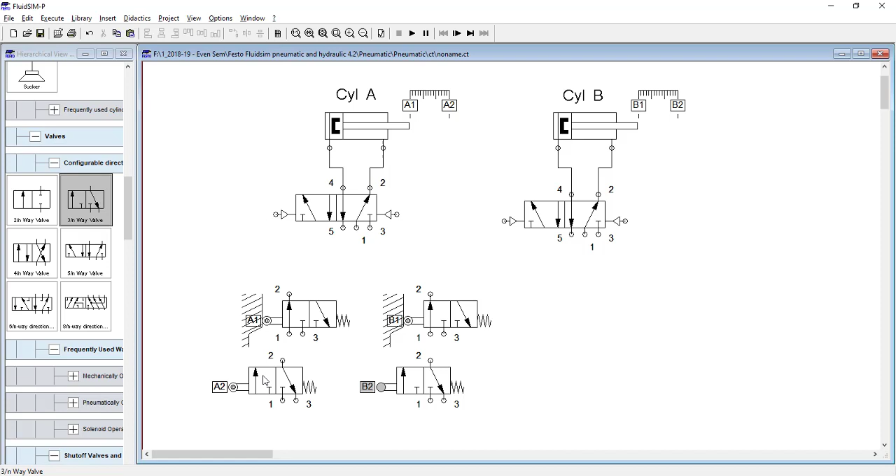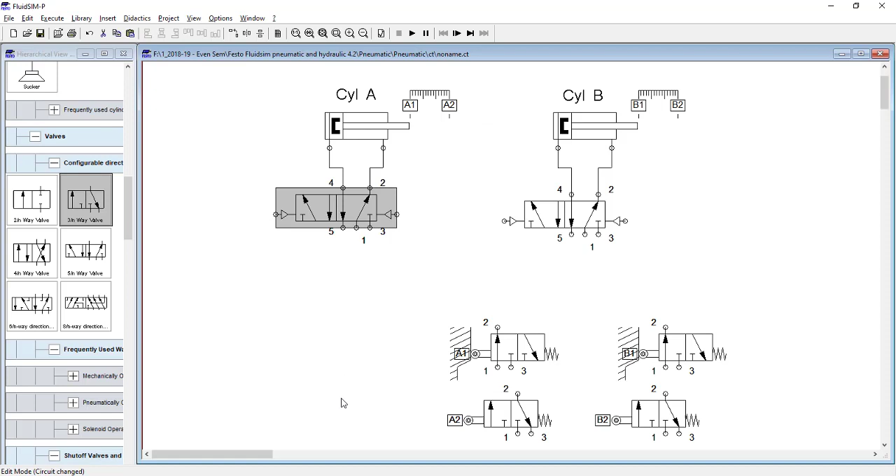So what we will do? We will put, where do we put A1, A2, B1, B2? To put them, we will use this diagram. For A plus motion, which limit switch should be sensed? B1. So B1 produces A plus motion. How is A plus motion produced? A plus motion is produced when this valve's left position is active. So we have to activate this position for A plus to take place, and A plus takes place because of B1. So we take this B1 and connect it to the left side of this valve, so that whenever B1 is active, this valve will become active and A plus motion will take place.

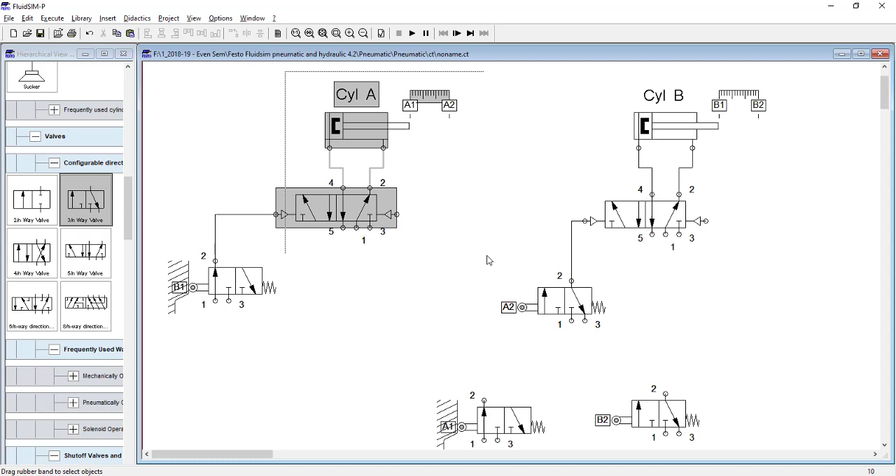After A plus motion completes, B plus should occur. For B plus to occur, which sensor must be sensed? A2. So we will take A2 and put it over here, connect it over here. Because of this, whenever the A2 sensor is sensed, whenever piston A comes completely outward, A2 will be sensed. As soon as A2 is sensed, it will activate this left position, and because of that, cylinder B will move forward. After cylinder B moves completely forward for B plus, which sensor will be sensed?

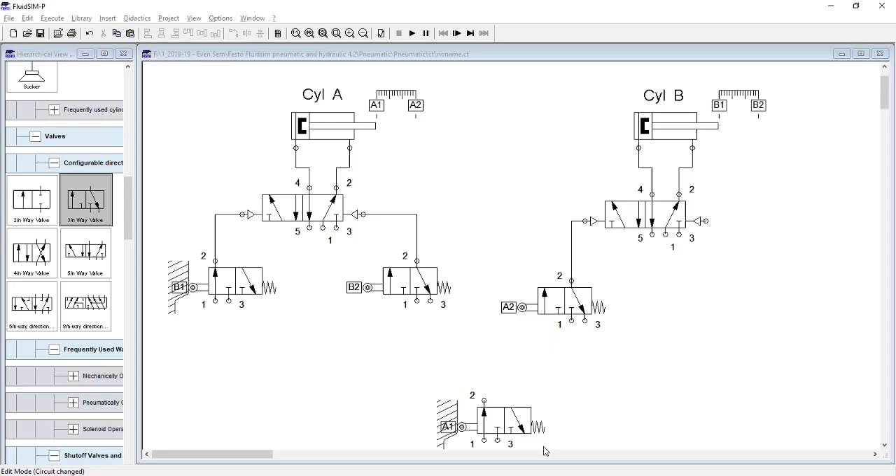B2. And because of B2, A minus should take place, meaning it will move inwards. So we will put B2 over here. After B2 is sensed, A minus completes. After A minus completes, which sensor is sensed? A1. So A1 produces B minus motion. So we will put A1 over here, it will produce B minus motion. This is how the entire arrangement should be done.

Now we have to put compressors everywhere. Ideally, there might be only one high compressor and one low compressor, but right now we will make many compressors just to make the diagram a bit easier to understand. Ideally, there should be maximum one or two compressors - one compressor for both the 5/2 valves and one compressor for the 3/2 valves, because the 3/2 valves are used only for switching, so they do not require very high pressure. But the 5/2 valves require very high pressure. So there may be either one or two compressors depending on how your system is being designed. But right now we can draw as many compressors and exhausts as we like. That is what I am doing over here.

Right, so now see, as soon as I start this simulation, see what is going to happen. Okay, I just forgot the compressor over here. Sorry.

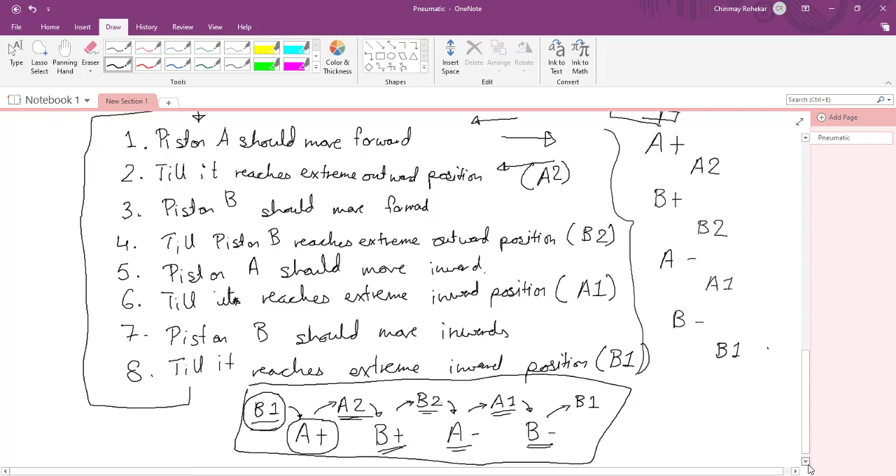So what do I have to do? I have to put a start switch somewhere. Where should I put it? I will put the start switch over here, which is the first initial motion. Initial motion is A plus, so I have to put the start switch over here.

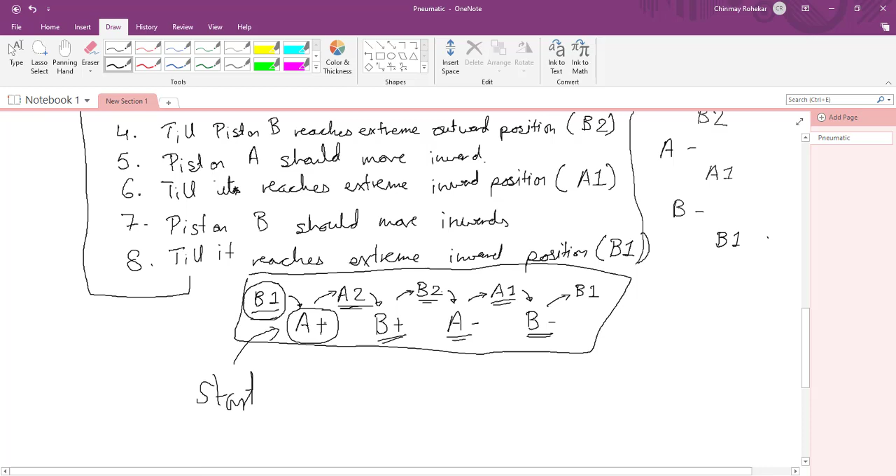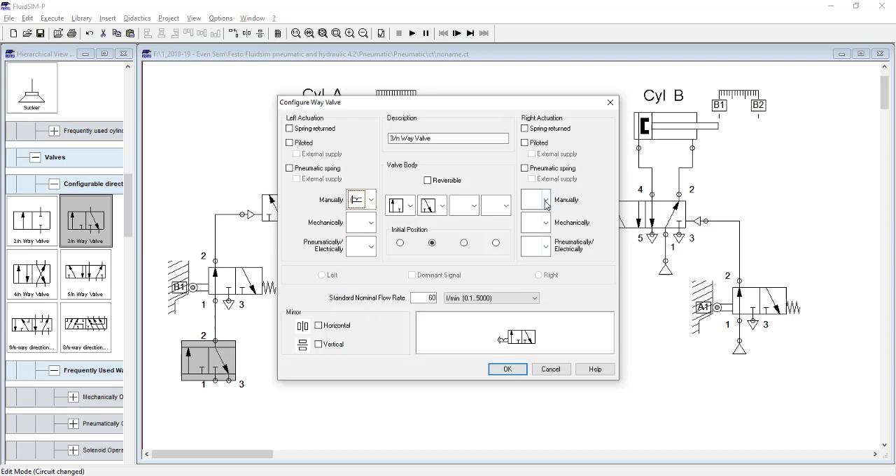Now the start switch will be a kind of switch, right? So rather than putting a compressor over here, I will also put a 3/2 valve over here. This 3/2 valve will be the switch, and below this I will attach the compressor.

So what happens: as long as the switch is not pressed, I will just show you. See, now even though I have started the compressor, the motion hasn't started because I haven't started the switch. Now if I turn it on, the motion will start. And then if I turn it off, the motion will stop. So this is how this system will work.

So that is why we will put a switch over here. Now I will just explain the working to you in very short. First of all, what happens? First, I will push this start button.

As soon as I push this start button, see the compressed air will start going upwards, because piston B is in its inward position, B1 is active. Because B1 is active, the compressed air will be able to go upwards. Compressed air is going upwards.

So compressed air will change the position of this 5/2 direction control valve. The position of the 5/2 valve is changed. Compressed air is going to the left side, and from the right it is going to exhaust. So the piston will start moving forward.

As soon as the piston moves even a little bit forward, A1 gets deactivated. So piston A will continue moving forward until it reaches A2.

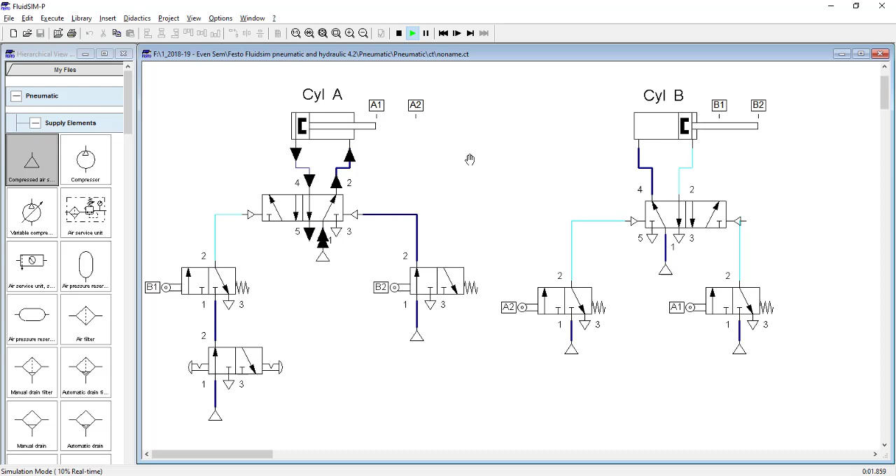So this was the example of controlling two cylinders. This was the basic method of controlling two cylinders. We will see how this motion fails and what is a cascading circuit in the next lecture. Okay, so thank you.